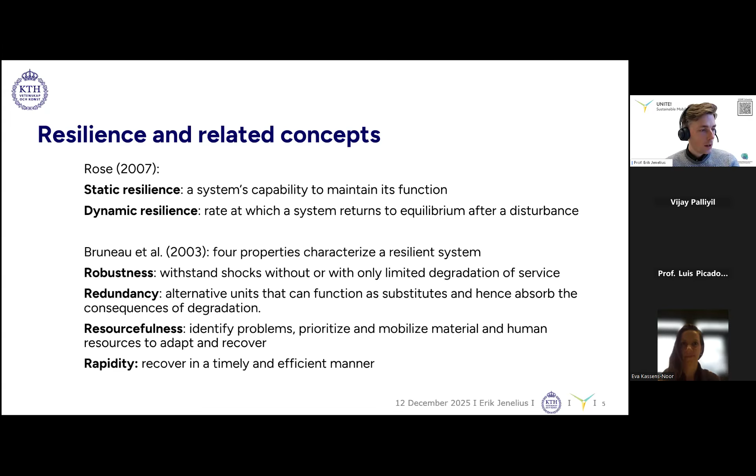Then a disruption occurs, so the performance level drops. The disruption ends, and we enter a phase of recovery, so the performance level goes up again. And finally, we reach a new normal state, which might be the same as before, or hopefully not, but could be worse, or even better—we could reach a better state than what we had before.

This figure also highlights these different phases of the disruption: the before, the during, and the after phase. In this way, we could make a distinction between robustness and resilience, so we can view the robustness of the system as the level of performance that we can maintain even during disruptions.

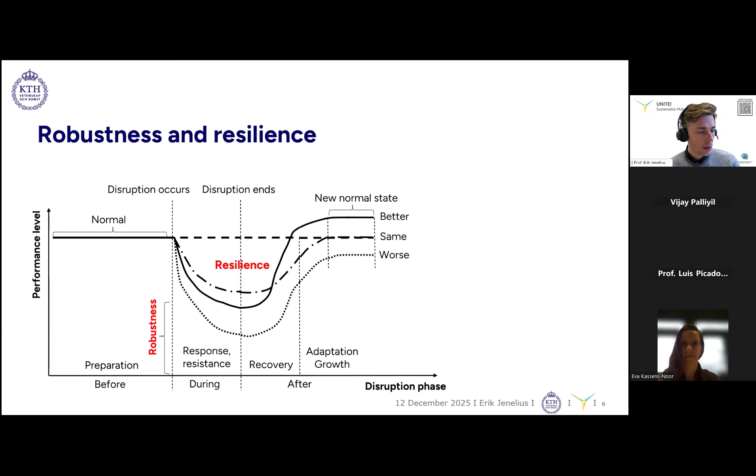Disruptions to the transport system can occur in different ways. I think a pretty useful model of the transport system in this context is to view it as different layers. So at the bottom, we would have the infrastructure, the roads and the rail lines, etc.

On top of that layer, we have the transport services, which are the public transport routes, rail lines. We have the shippers of goods, etc., that use the infrastructure to move people and goods. And on top of that, we have the actual travelers on the system. We have the actual goods that move with the help of these services.

And we also have another layer, which is the management layer, where we have the planners and policymakers that make different types of decisions that can influence all the three different layers. And in terms of resilience, we can have disruptions in all of these different layers.

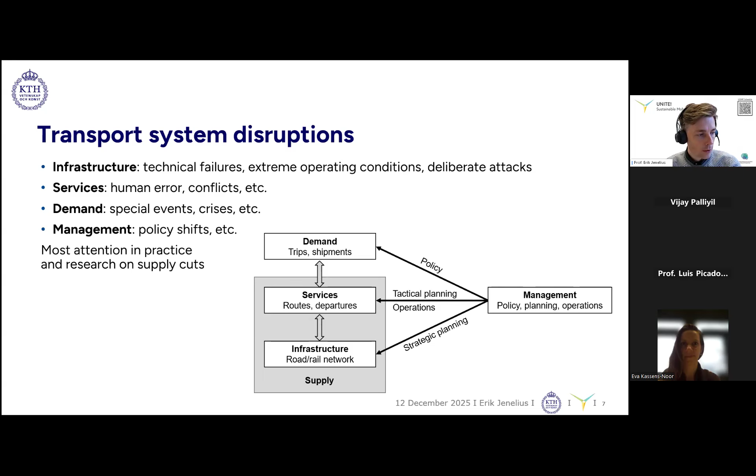So here is just a few examples of real world events, big disruptions, taken from different modes of transport. There can be things that affect maritime transport, like rough weather—this is a passenger ferry that sank in the Baltic Sea in the 1990s.

We have examples of terrorist attacks on the rail network in the 2000s. We have extreme natural hazards like the volcanic ash cloud, earthquakes, hurricanes, extreme rainfall—just to take a few examples.

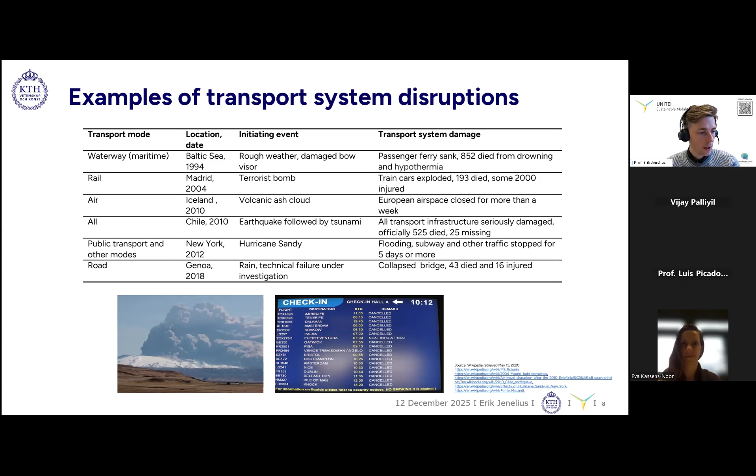Our different modes of transport are different. They have fairly different characteristics that also affect how resilient they are to disruptions. Road transport, I would say, is characterized by relatively high levels of independence for users. We as travelers have quite high flexibility on our decisions—where to travel, when to travel, etc.—and there are typically more than one route to go from one place to another in the road network.

So users are fairly well equipped to handle disruptions, but remote areas can still be vulnerable to disruptions at particular critical locations, for example a bridge to an island and so on. Also in urban areas, they can be quite vulnerable to cascading congestion and queues in case there is a traffic accident or something that blocks an important road.

Rail transport, on the other hand, is fairly sensitive to disruptions in general. It's a much more regulated and controlled system, which means it's more rigid and less flexible to change operations in case there is a disruption. It's more dependent on other critical infrastructure like electric power, ICT systems, mechanical and electrical systems. So there are more things that could go wrong in general in the rail system than in the road transport system.

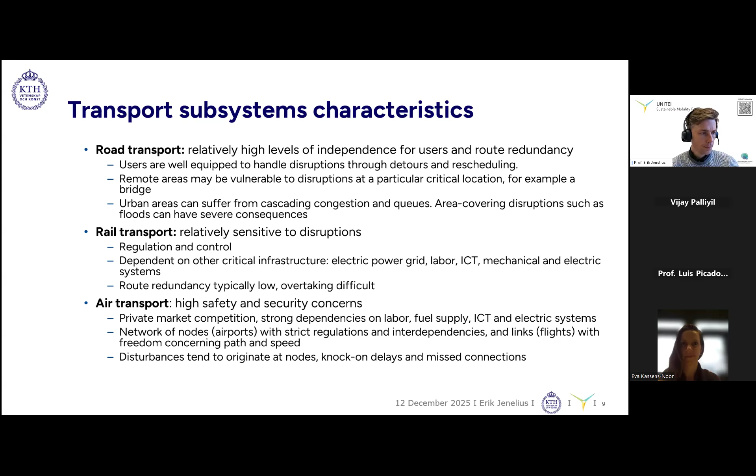So the disturbances tend to originate at the nodes, which can cause a lot of knock-on delays, missed connections, and so on.

One way I think can be useful to measure the performance loss in a transport system: if we remember the resilience curve that I showed before, we should have some measure of system performance or system function.

One way to do that could be to measure it in terms of how well the supply, the transport supply, is able to meet the transport demand. So in normal circumstances, hopefully the supply in terms of capacity in the road network and the rail network and so on can reasonably well handle the travel demand.

But in case there is a disruption on the supply side, then capacity goes down, and then we are not able to accommodate all the demand that wants to use the network. This would lead to a loss of function for a while until we can recover the supply level back to normal.

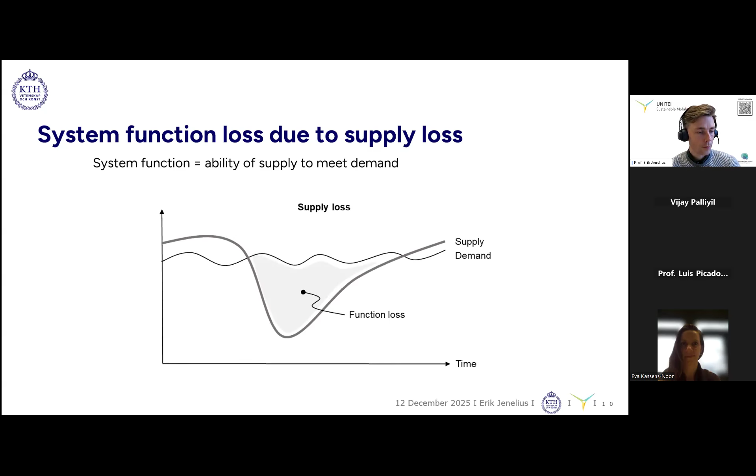Transport infrastructure can be disrupted in many different ways. I alluded to it already a bit, but we can have some type of disruptions that are natural, meaning they are caused by nature, like disasters, extreme weather, and so on. We could also have technical failures in the infrastructure.

Then we have disruptions that are caused by humans, but are unintentional. So we have accidents, handling errors, negligence.

And finally, we have human-made disruptions that are intentional, where we have some form of antagonist that wishes to cause harm to the transport system. That could be a labor market dispute, but it could also be criminal activities, terrorist attacks, or even acts of war.

Some disruptions originate within the system itself, whereas others originate outside of the system.

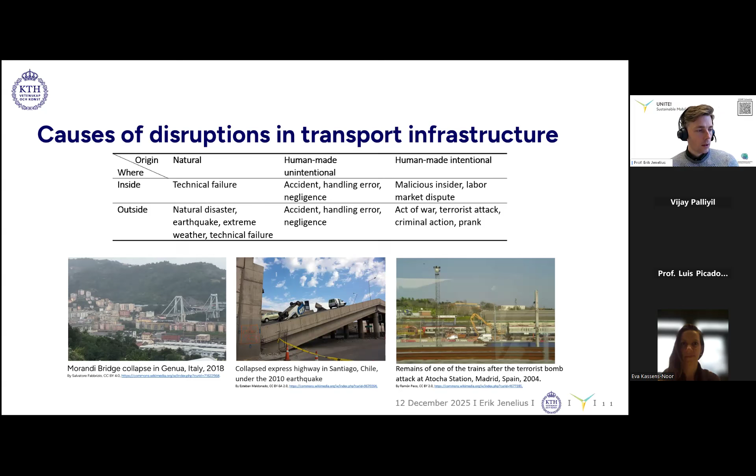Extreme weather is a common cause of disruptions, and there can be many types of extreme weather. Different modes of transport are sensitive to different types of extreme weather.

Heavy snowfall, for example - well, there are few transport systems that are completely robust to snowfall. Roads can be blocked, icy and slippery, rails as well. You could also have electricity losses due to snowfall. Airport runways can be blocked, etc.

Heavy rain can cause floodings, but also roads or tracks being washed away. Drought can lead to forest fires that cause blocking of roads and rails. Heavy winds can affect waterway and air transport, and so on.

Another type of disruption that hasn't been analyzed as much as infrastructure disruptions or supply side disruptions is when something happens on the demand side. In this case, the supply side, the capacity of the transport system, would remain the same, but we would have a sudden, either short-term or long-term, change in travel demand. That means the supply cannot meet the demand.

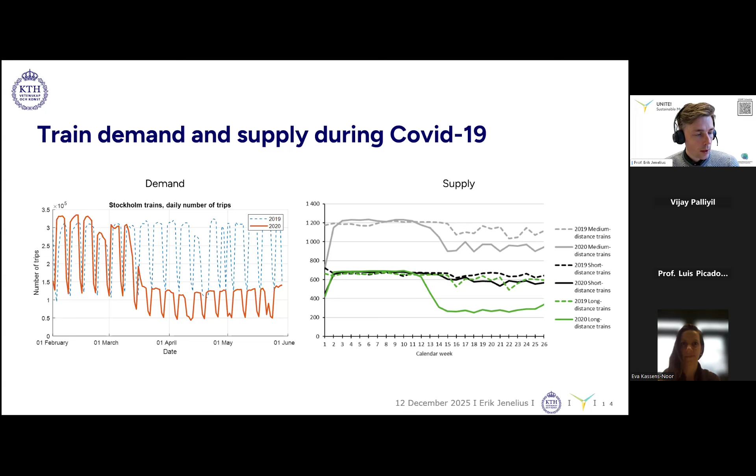Whereas on the supply side, most of the trains continued to run as normal. The supply remained much more constant than the demand. Okay, so how can we analyze the resilience of a transport system?

There have been different approaches used. One approach is to try to draw conclusions based on the structure of the transport networks. So I mentioned that, for example, the road network is generally more resilient than the rail network because there is more redundancy, more alternative routes. That's something we can analyze through the topology or the structure of the networks.

So we can quantify the redundancy of the networks by looking at the network structure. And we can identify critical points in the networks, where for example we have bridges that connect one side of the network to the other. Those points would be very vulnerable to disruptions.

A bit more sophisticated is also to look at the flows through the network, where the travelers go and the goods go and so on. That tells us a bit more about what the consequences would be if there are disruptions, and how they could reroute to other alternatives in case there is a disruption.

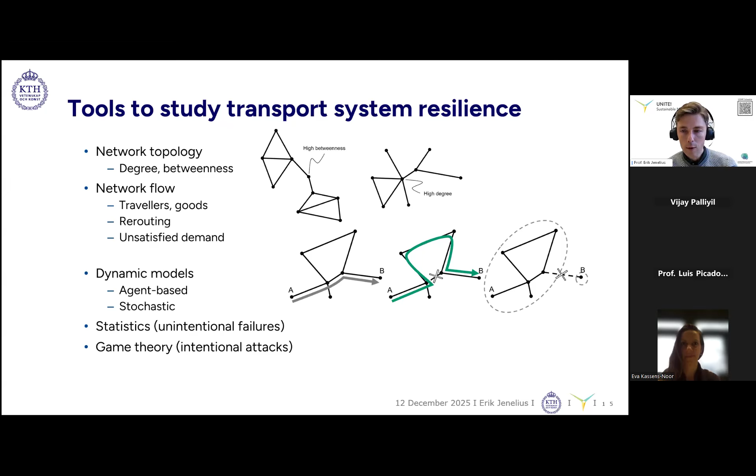Game theory, I think, is an interesting area that can be used to understand resilience, especially against intentional attacks. Probably an antagonist wants to achieve the most damage as they can, so they try to find vulnerable spots in the system. And if we try to protect the system, we protect those vulnerable spots first. Then maybe the attacker will try to find other locations. We can apply game theory concepts to understand how those interactions would work out when we try to protect the transport system as much as possible.

So, how can we increase resilience? Well, we can come back to these strategies that I mentioned in the beginning. We can work to increase robustness.

How can we do that? We can make the infrastructure more robust: the roads, the bridges, the railways, the drainage, not least like the water pipes under the roads and rails, so that they can withstand and absorb external shocks better. We can improve the inspection, repairs, and maintenance.

Redundancy we can improve by adding more links, increasing the number of alternative routes. We can enable different transport modes to substitute for each other. If one mode goes down, then the other could serve as a backup.

We can have better planning to have spare capacity for both personnel and vehicles in, for example, public transport, so that they can jump in and cover if there are suddenly people sick or technical problems.

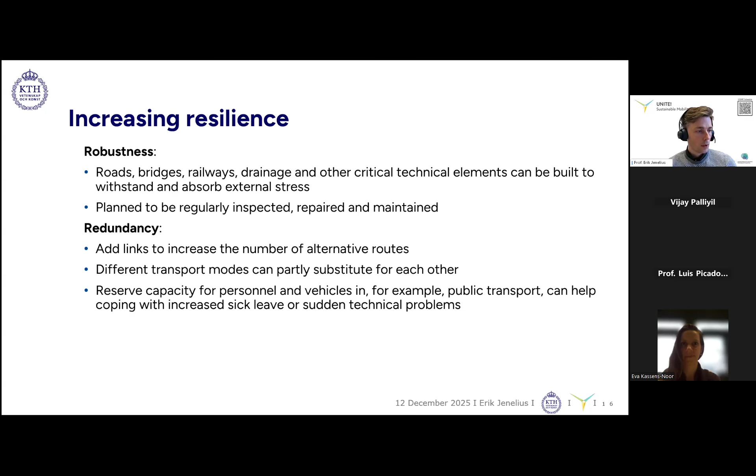Also, we can work on improving resourcefulness and rapidity. So we can improve our capacity, our level of readiness, to have relevant equipment and trained personnel on standby, to have proper information systems, to have quick response in case something happens, and to provide travelers with relevant information so they can make better decisions on their own how to act.

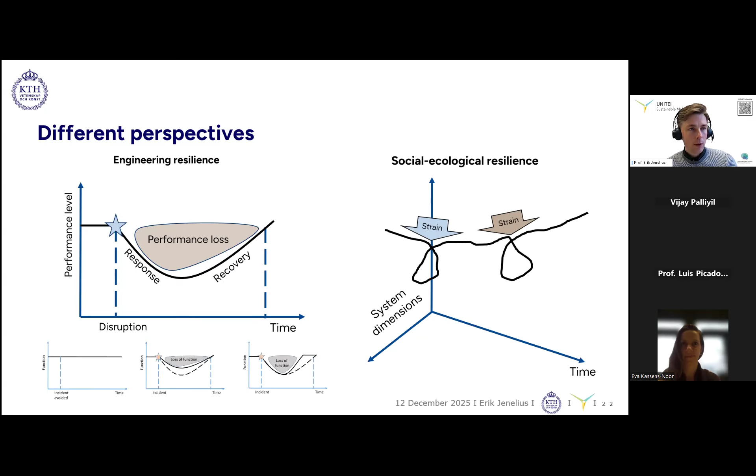I think that perspective is quite useful, especially for long-term disruptions like the COVID-19 pandemic. When the impacts have lasted several years, I think it's fairly meaningless to talk about returning to the same state as before the pandemic, but rather how the transport system can evolve into something again relevant and useful, but not necessarily the same as before. So we are working on developing methodologies for understanding resilience from the social ecological point of view, and we are applying that to public transport in an ongoing project.

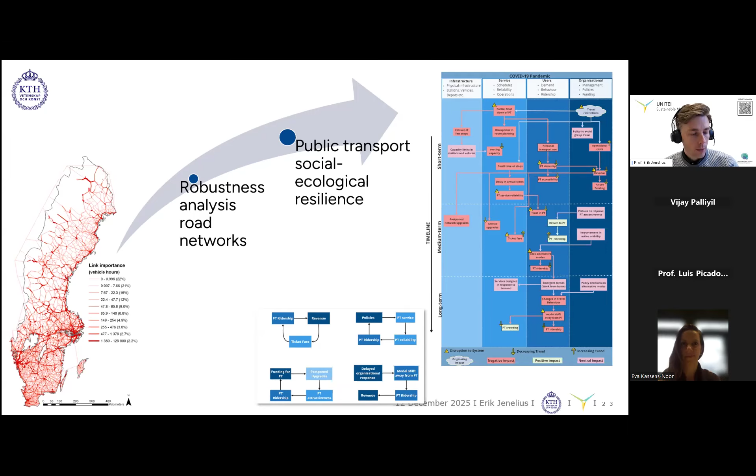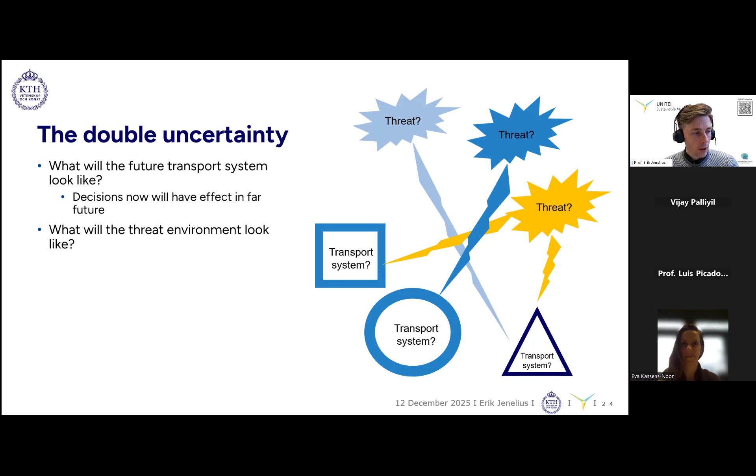Just to wrap up, I think one feature that characterizes resilience analysis is that we have to deal with a lot of uncertainties. What will happen in the future? The transport system is constantly changing and evolving. We don't know what the future system will look like with new technologies and policies, etc. And we also don't know what the threats will be in the future, how climate change will evolve, how the geopolitical situation will evolve, etc. So we have a lot of challenges when we try to analyze resilience. We need to handle uncertainty, deep uncertainty. We cannot really put probabilities on different things, but our uncertainty is more deep than that.

So we probably need to work with other types of tools. Scenario analysis, I think, is an important one, where we try to map a wide set of possible future scenarios and see what would be the impacts of disruptions to the system in different future scenarios. And then we can apply different tools for decision making under uncertainty to see which actions to increase resilience would be useful under a large set of future scenarios. That might be strategies that we should go for.

So to conclude, I've talked about the resilience of the transport system. I defined it as the ability to prepare for and to withstand, absorb, adapt to shocks, and to recover from the consequences timely and efficiently. The transport has a key role for other infrastructures. I didn't emphasize this, but also if there are disruptions in the power network or the water network, then you need a transport system to go out there and repair that.